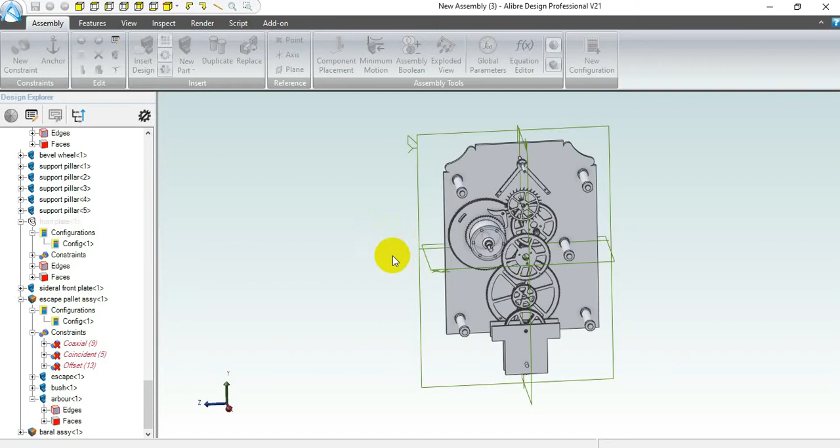And this is the clock that I'm designing at the moment. It's the original clock, and this part around here and all this mechanism here is basically a John Wilding regulator clock mechanism, and I've done it exactly as it is designed. But on the bottom here, the hour hand wheel comes off. That's the hour hand wheel, so there'll be an arbor coming out here driving the hour hand.

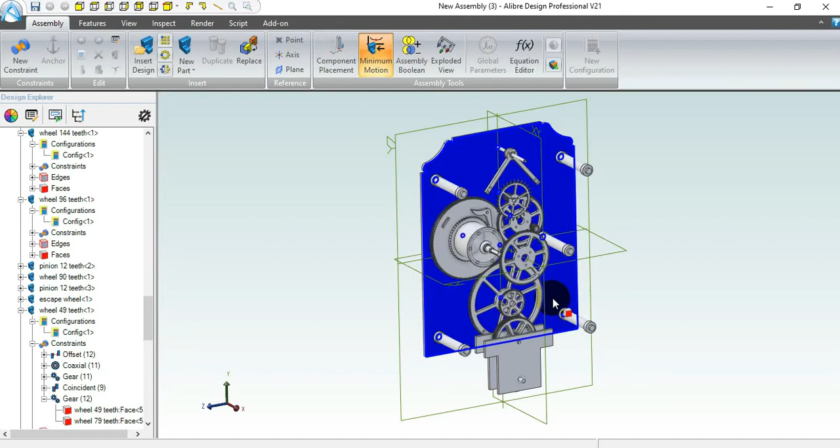Off this particular one here, there'll be the minute hand, and this one here where the escape is will be the second hand. But on this, I've added an extra part to this clock, and there's a few more things going on here. So I want to have a sidereal train built into this clock. So not only does it give the hour hand going around here, there'll be a small dial about here somewhere showing the regular hours. It'll also have a takeoff gear that drives this train here.

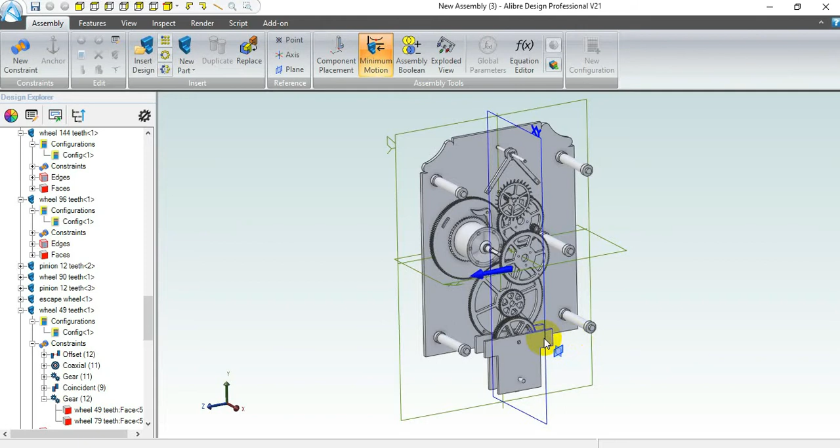Now, sidereal time is 4 minutes and 4 seconds less than 24 hours. The reason for that is, as the Earth rotates to the Sun, one full revolution is 24 hours. But the position of the Earth also changes as it rotates, because it's also in orbit around the Sun. So when it comes back to the centre of the Sun again, which is our standard 24 hours, the Earth's in a slightly different position because it's in orbit around the Sun, and therefore that's our standard time.

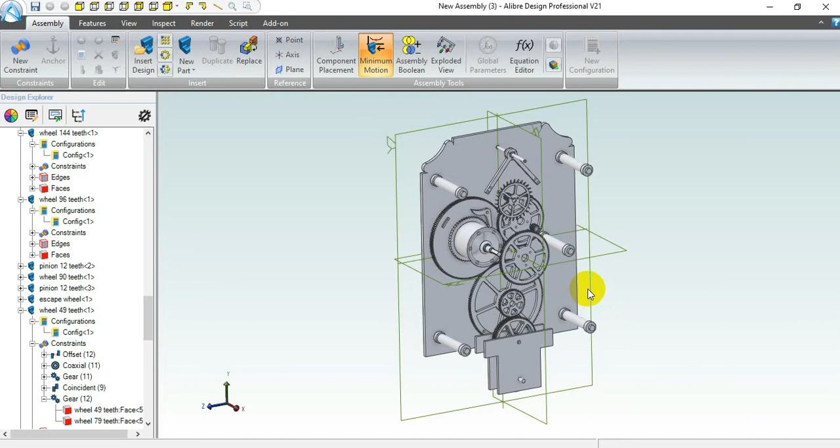But if you do the Earth rotation to a star that we're not in orbit around, it is 4 minutes and 4 seconds less than the regular 24 hours, and that's called sidereal time. Now, this particular train that I've built in here has a number of wheels driving through here, connecting through here, and then down to a shaft and a bevel gear at the end of it, and this will then go on to drive a sidereal sky chart, like a night sky chart, further down the clock.

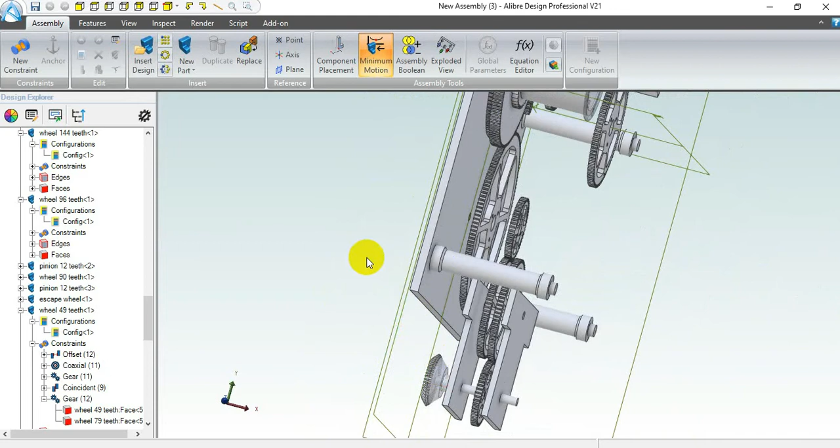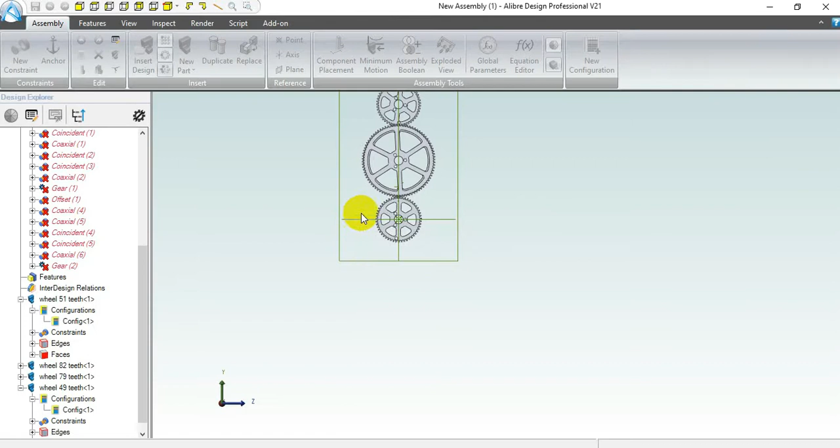Now, this train here, I'll just close this down, and we'll close that window, and I'll just have a look at this sidereal train in particular. And this is the same train here. I'll double click on that. And this is the sidereal train again, but just on its own separately.

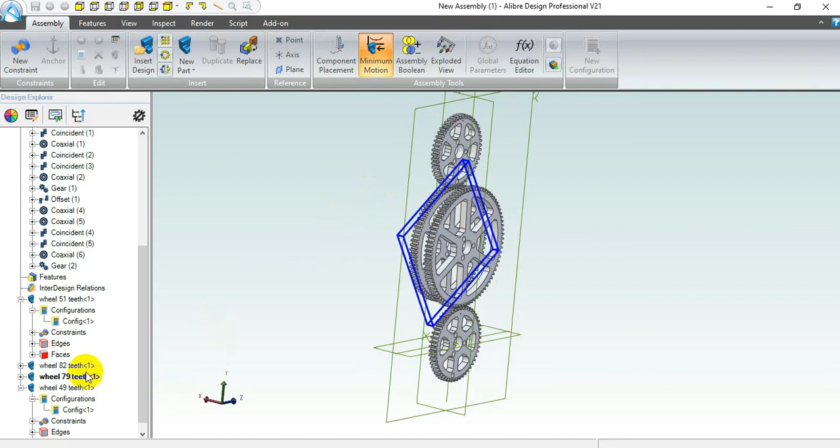Now, according to my research, to come up with the correct ratio, we need a 49-tooth wheel driving a 79-tooth wheel, which is that one there, keyed or in unison with an 82-tooth wheel, which is that one there, driving a 51-tooth wheel. And you can see here that that's exactly what I've got here.

And not only that, because we're using a CAD package that has mechanical linkages that you can hook up here, I can put the ratio of these particular wheels in, and I can grab this here and drive this wheel around, and it will drive the other ones, and you can see the ratio happening there.

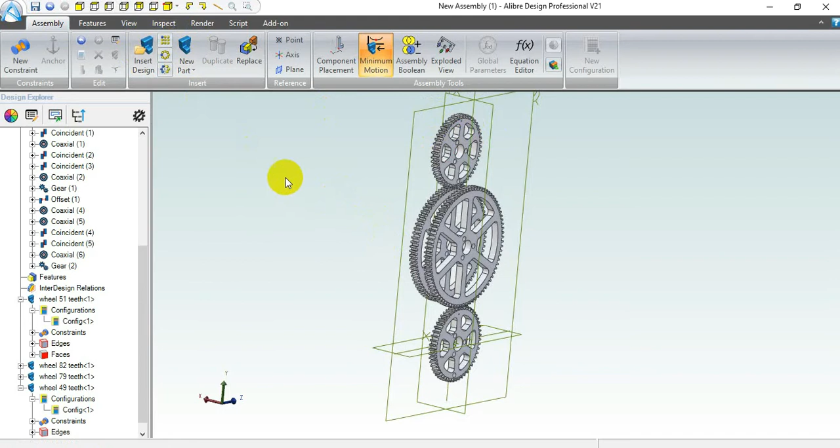Now, let's have a look at this. I want to check this train. When I first put this in I had the train round the wrong way, and I worked out what was going on. So we'll just leave that front on here. You'll see here that I have a tiny little dot here, there, and I'll just go right in. There's a little hole through there, and down here we have another little hole there.

Now I've already cranked this around a bunch of times to check this, but what I should see in this, as I rotate this, which is the hour hand wheel here, so that little shaft will come through here, is that as I crank this around clockwise, this will also go around clockwise, but that little dot there will slowly retard to the left slightly slower, the 4 minutes and 4 seconds over time.

So we'll just go and view that again, and we'll go in a little bit closer, and let's see if what I say is correct and prove whether or not this train is going to work. So we'll just grab this wheel here, and as I rotate this clockwise, we should see that's 1, 2, that will be 4 minutes and 4 seconds less than, and we don't really see much of a change in the bottom there because it's such a small amount on an hour hand wheel.

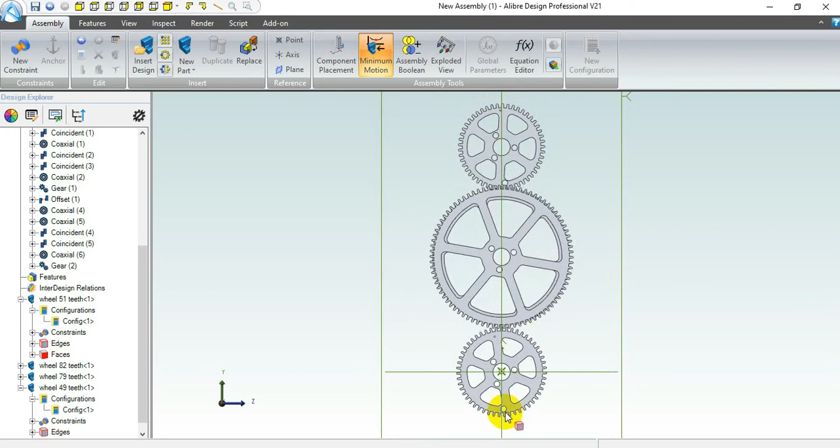But as we keep rotating, 1, 2, we should see this little pip mark here slowly retarding to the left as this runs. So we'll just keep going and just prove whether or not this is correct. We'll just do a whole bunch of turns here.

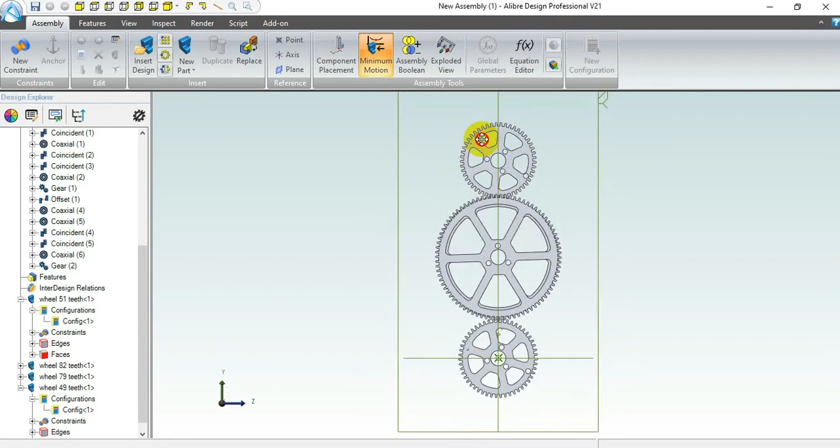Okay, there's a few there, and as we come up here back to top dead center, we'll have a look here, and of course my little hole there is slowly creeping, retarding to the left, the equivalent of 4 minutes and 4 seconds per 24-hour day. So we've proved that this particular ratio is correct.

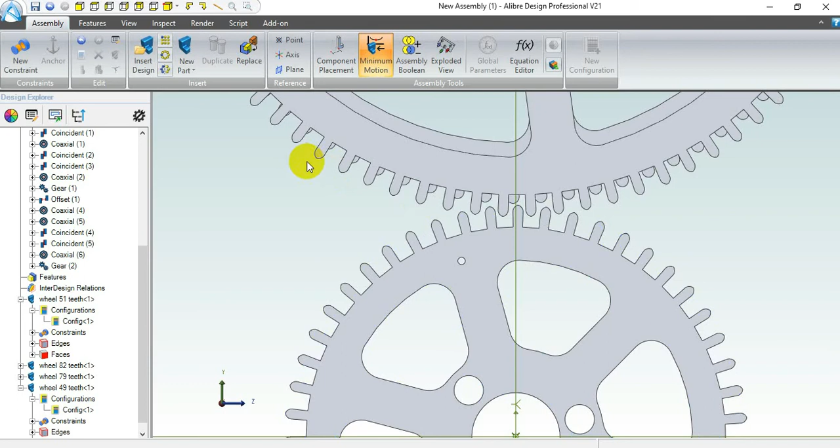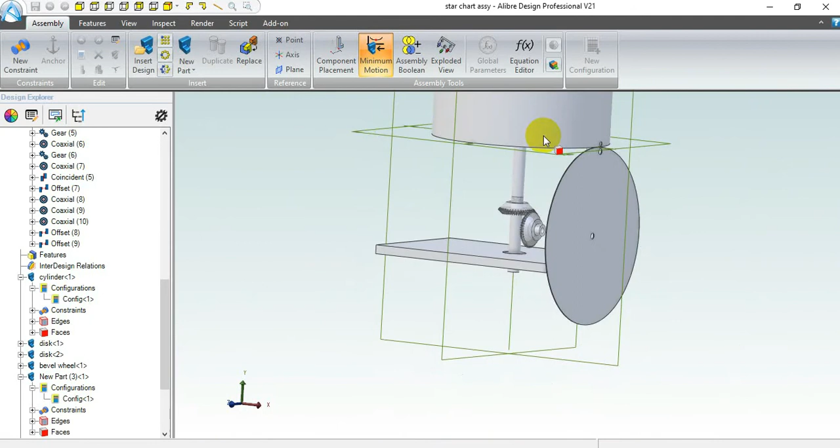Now, what that's going to do in the end, I'll just close that down. I'll close that. I'm going to click on this one here, which is the star chart assembly. We'll put that in isometric. This is the star chart assembly, or at least part thereof, and you see there's a shaft coming down through here. There is a disc being driven by a bevel gear off the shaft, a drum, which is this one here, and another disc up the top.

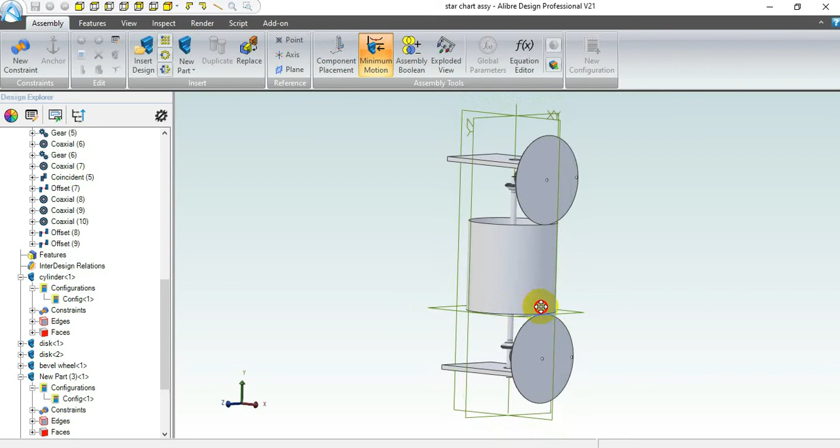Now if I grab this, I've got this linked up mechanically as well, and that's all 1-to-1 ratios. If I grab this drum here and rotate that, you'll see that the two discs and the bevel gears are all rotating. So if I go backwards and forwards with that drum there, you'll see I put a little dot there, and if I grab that disc there, you'll see that they rotate in unison.

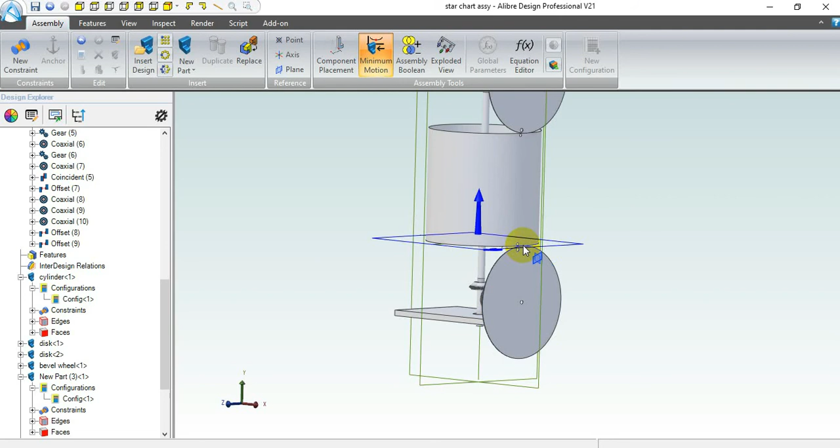And on this particular disc here, this will be the southern hemisphere night sky. So in Australia we'll see the 2 pointers and the Southern Cross, and up from that will be the pole in the centre up to 45 degrees there, and so that would be the night sky from the pole to 45 degrees, and then there will be the night sky from 45 south to 45 north,

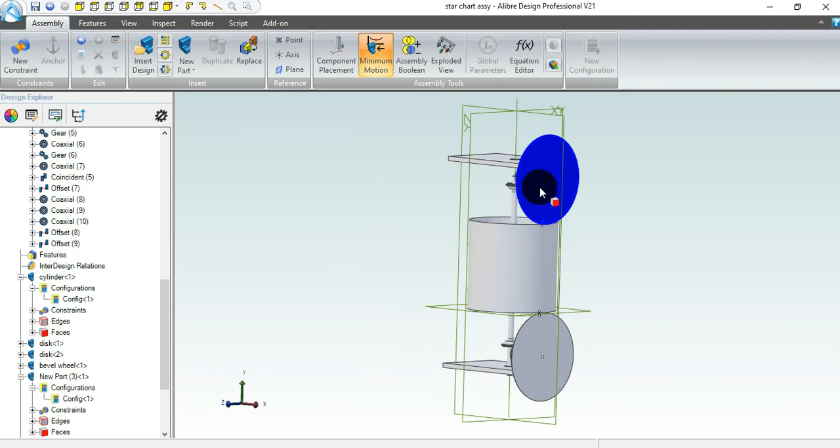and then the other 45 degrees to make up the full 180 degrees will be up the top here with the northern night sky, and of course, I'll just hit the home key there. There will be the Big Dipper, and of course the pole star will be in the centre there. So as this drives these little bevel gears here, you can see the bevel gears driving here.